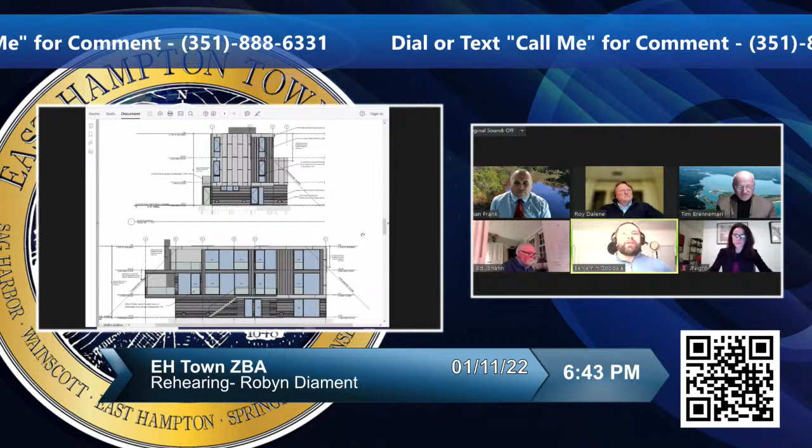I think that you could flip to the next elevation page. See if there's anything that's relevant.

We stayed within the allotted pyramid plane relief that had been granted, so essentially we tried to work within what we have and conform. We're not asking to come any closer, we're not looking to increase the nonconformity in any way. Essentially, it's some minor architectural modification to some of these elements.

So on the top elevation, on the left side, that's the other side of the mechanical room and the storage, which you also see in the middle of the lower elevation, just right of center on the first floor above grade.

And Benjamin, you're also staying within the allotted height of the building as well. Is that correct? Yes. Exactly, no changes to the elevation. Everything here was called out very specifically in the original variance. So the max elevation, the first floor elevation, the proposed, existing and final grade at the entrances to the house are all as per the original approval.

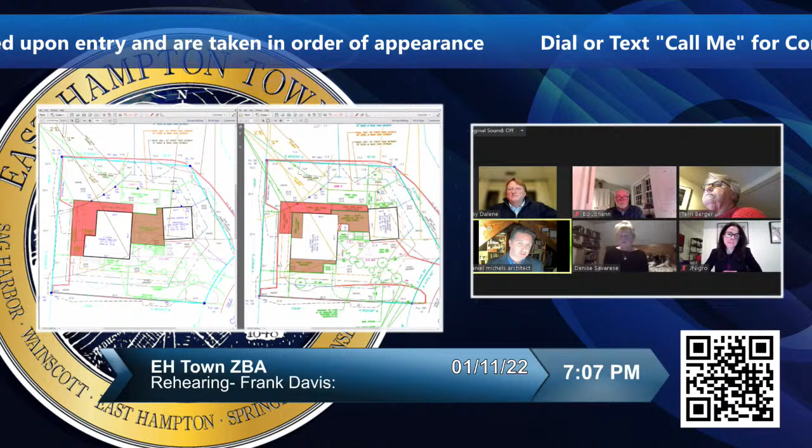We also eliminated the need for the construction materials to construct those two additions, and the demolition that was involved on both of those sides of the house, eliminating further waste into the landfill.

The alteration that was approved originally was modified slightly, pulled back from the wetlands between the two buildings. As part of the initial approval, the owner has installed a nitrogen reducing system, which is outside of the 150-foot wetland setback. We will be revegetating the property, which was pre-existing 100% cleared, into the current clearing code.

The original approvals remained as intended. There is reduction in disturbance to the site, and there was modification to that addition linking the buildings, but I do believe that what we have proposed and what was completed was in kind with what was approved.

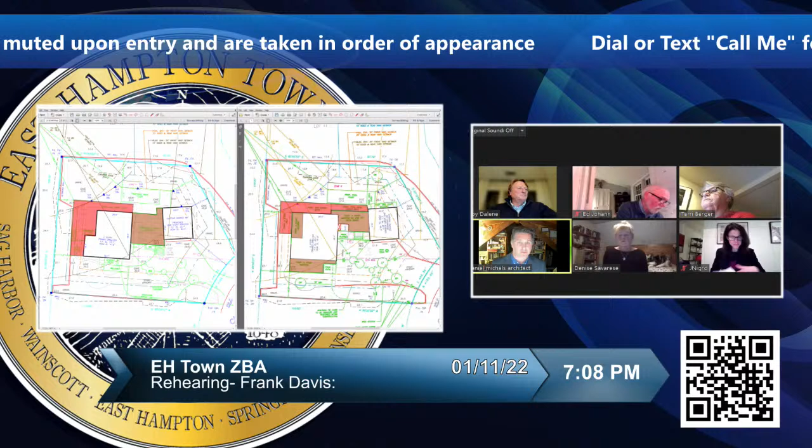Okay, thank you, Daniel. Board members, any questions? Well, concern - we talked about the demolition and the disturbance to the site. The site is pretty disturbed generally around the entire property. I'd like Mr. Michels to address the garbage that's running, that's getting blown around, and we want to clear that up. Also, how did you account for the character of the neighborhood in making this change, moving some of the extensions of the house to the west side, and creating that large 2-floor extension and extending it further to the south than was originally approved also?

Sure. I'd like to speak to the trash. I have been requesting that it has to be cleaned. I have cleaned it several times myself. Apparently the cover has blown off the dumpster, and I was there just last week and there was not that garbage there, so it must have happened over the last few days, and I will have that taken care of tomorrow immediately. The builder has gone through a tragedy with his family - his daughter was in a terrible accident, so it's been hard to communicate with him lately, but I will have that taken care of tomorrow for sure.

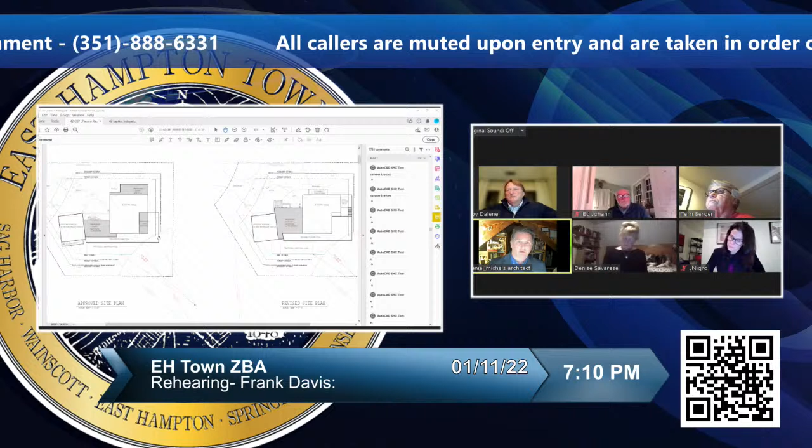Unencumbered views out to the water, where formerly they were disturbed by these 2 additions. Looking over this 1-story addition that's now 2 stories, you look directly at the roof of a house to the north, which is on the water. So the neighbors' views of the water are not affected by shifting these additions over to this addition here. So we felt it was appropriate a change.

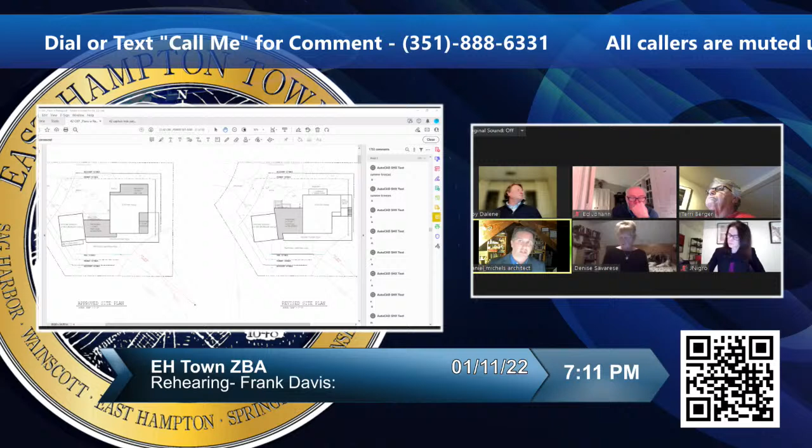Yeah, it does affect the views from the street, though, as was shown in the photos of anybody who's just going by. I did have another question - you said there is a re-veg plan, and I believe maybe Tyler can show that to us. I have it here too, I could share if you'd like. Yeah, let's take a look at that.

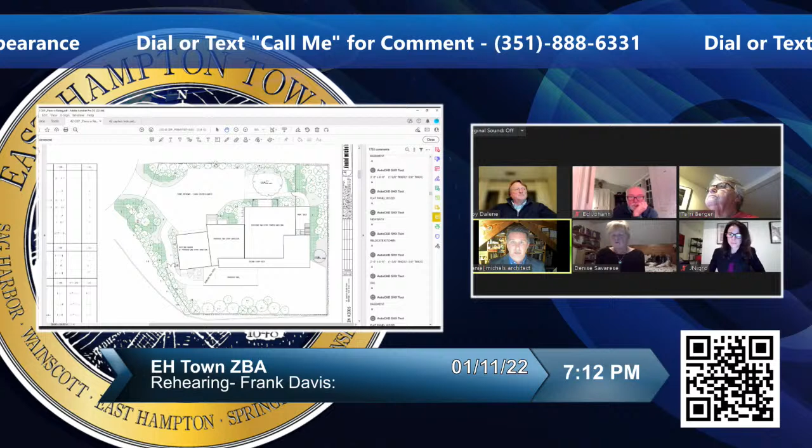So this is very similar to the original approved re-veg plan that was done by Jim Grimes. We have also included this area here, which was basically just brambles and was cleared out, and we're going to be revegetating with bayberries, pasture rose, some cedar. All along the south side is bayberries, and along this side as well, bayberries, some shad bush, and some cedars for screening, which follows suit to what was originally proposed.

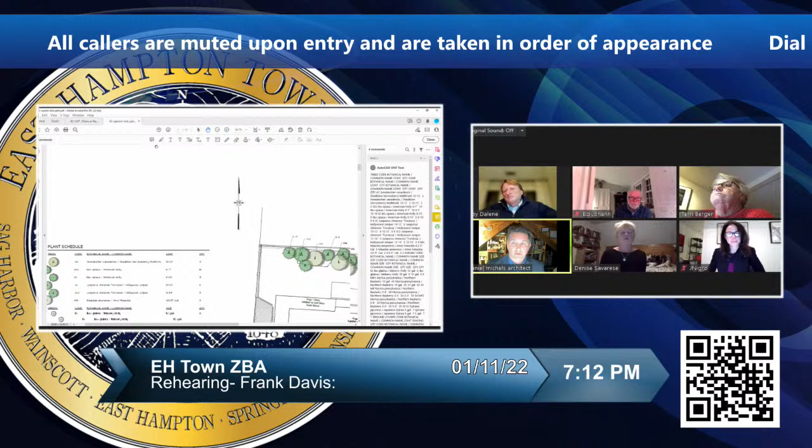It's very similar to the original plan, which I can show you here as well. This was the original - so re-veg here along the property line, some re-veg along the back north side, and then along here. This was shown as undisturbed, but it really was just messy, and so we're going to clean that up and replant.

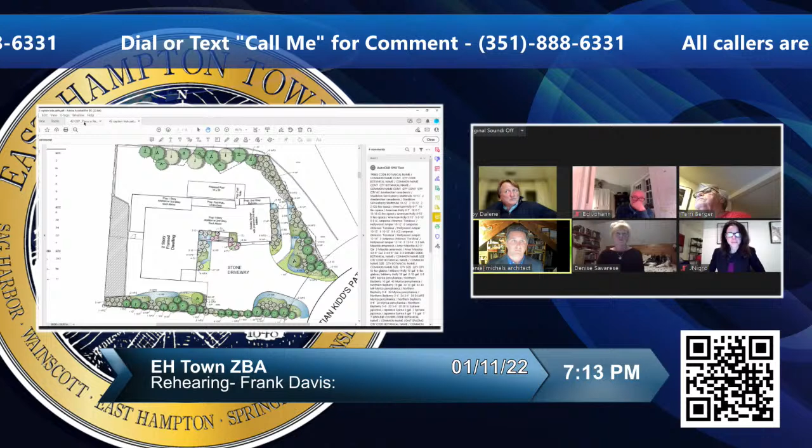Pretty much follow what was shown here. Okay, now, as you were looking for that, you had a photo of the before of the house - could you just show us briefly? That was the rendering from the original architect. Yeah, so that was the original look of it.

Correct. Okay, now, the applicant wants to keep all the decking on the western side that was originally slated for the extensions. Would you be willing to covenant that portion of the decking so it would never be enclosed or requested to be enclosed? I think, sure, that's a reasonable request. Absolutely.

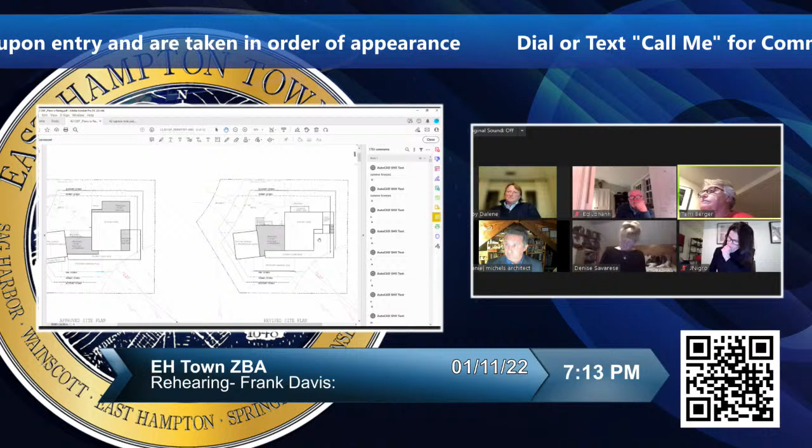Okay, you mean not covered by a roof? Right, second floor deck. Not become part of living space, interior living. I mean, I would consult with the owner, but I don't see any issues with that myself.

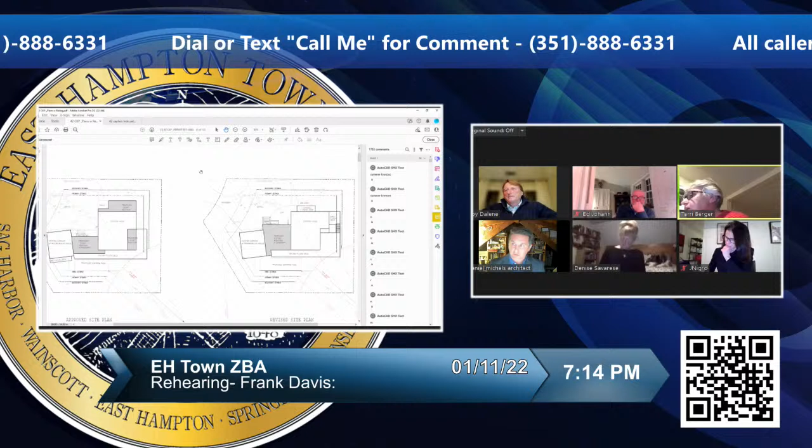Okay, and I just have one more question. I believe the amount of bedrooms was 4 bedrooms to start with on this, and it's remaining 4 bedrooms. Correct, I believe that's what I said. Okay, all right, that's my questions, Mr. Chairman. Thank you. Anybody else?

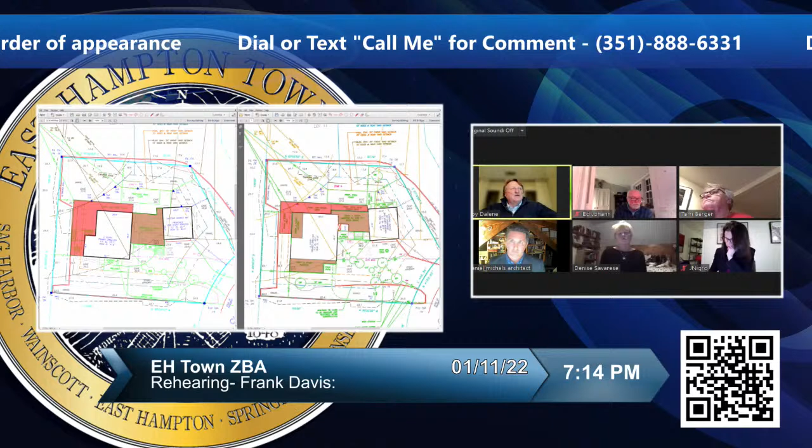No, then if we can go to planning, Tyler. Sure, absolutely. Tyler Borsak for the Planning Department. Tyler, if you raise your right hand, do you swear or affirm to tell the truth, the whole truth, and nothing but the truth? I do.

Thank you. So this project was originally approved for a 1,310 square foot addition, which with the shifting in the additions is the same number. There was some discrepancies from what I could tell, just doing some basic measurements. But I think what the issue was, originally the number didn't include the addition over the garage, which neither would have, so that didn't change, and I think that's where the discrepancy came from.

But the 1,310 square feet, which is the large section now in the center, is the same as the center connection, as well as the west and the southern additions combined. So essentially they just shifted those into one addition, condensed the footprint essentially, and changed the decking slightly. Overall, it's roughly the same impacts.

None of the setbacks have changed. Actually, the additions have gotten further away from wetlands. The decking remains the same because that northwest corner really is the closest point. But other than that, it's very similar as far as impacts on the surrounding natural features compared to what was already approved by the board.

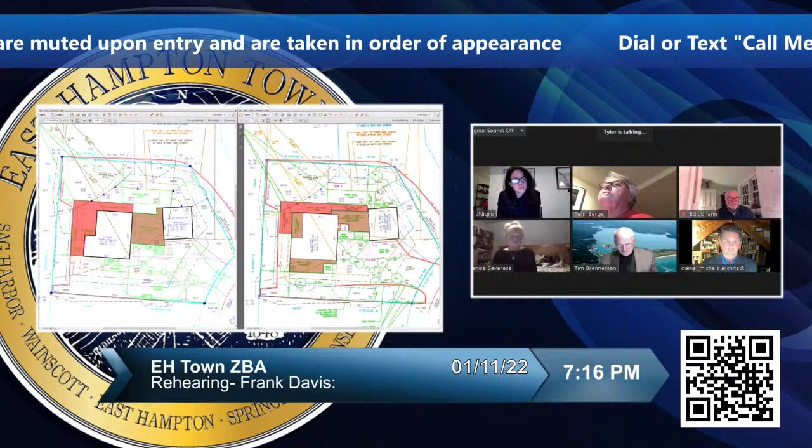Other than that... Okay. Sorry, no, go ahead. Now, can you point those out on the survey where the variances are? Sure. The closest points would be the corner here in the northwest from the wetlands to the decking, and then the additions onto the residence are a little over 100 feet, I think they're like 101 or something like that. So actually, I don't believe they would need a variance anymore.

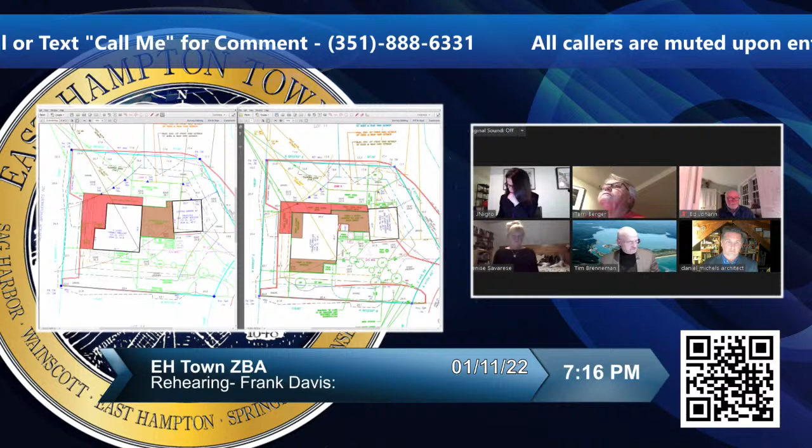Okay. For those, I could measure it out real quick just to make sure that I'm remembering correctly, but I believe they're a little over 100 feet now. In the original determination, the only variance was for that northwest corner of the deck. Right.

Okay, anybody have any questions for Tyler? No more. If not, Matt, is there any callers? You have 0 additional callers. Thank you. Okay, with that, Terry, would you like to close it up?

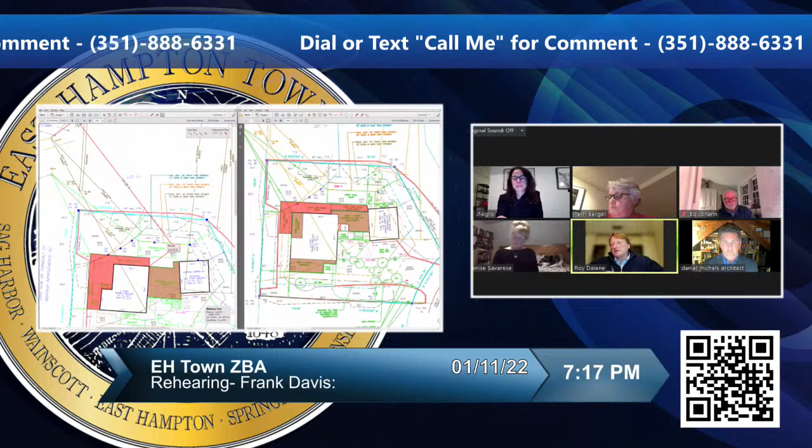Okay, yes. For the matter of the rehearing for Frank Davis, 42 Captain Kidd's Path in Montauk, tax map 300-004-01-02, make a motion to close the public hearing and to leave the written record open for 2 weeks from the time that the transcript posts on the town website.

Anybody going to second? I'll second. I'll second, and I concur as well. Okay, I concur.

All right, next we have a hearing. It's for Jeff Whelan. I don't know if it's Whelan or Whelan. I would say Whelan. 170 Marine Boulevard, Hampton Dunes, Amagansett, Suffolk tax number 300-176-04-12. The applicant is Jeff Whelan. Size and location is 15,002 square feet at 170 Marine Boulevard, Hampton Dunes, lot 49, map 4694 in Amagansett.

Description is to construct an approximately 740 square foot second-story addition, solar panels on the existing roof, repair an existing shed, repair an existing fence with new gates, replace the existing front porch, and an upgraded sanitary system within jurisdiction of setbacks of freshwater wetlands, duneland, and beach vegetation.

The relief sought is a natural resource special permit pursuant to 255-420 of the East Hampton Town Code, and 1 variance is required for this application. 1 variance of 39 feet is required from 255-4-30 of the Town Code in order to construct a second-story addition 61 feet from freshwater wetlands where a 100-foot setback is required, and any other relief necessary. The zoning district is B residence, AE flood zone, elevation 10, class type 2.

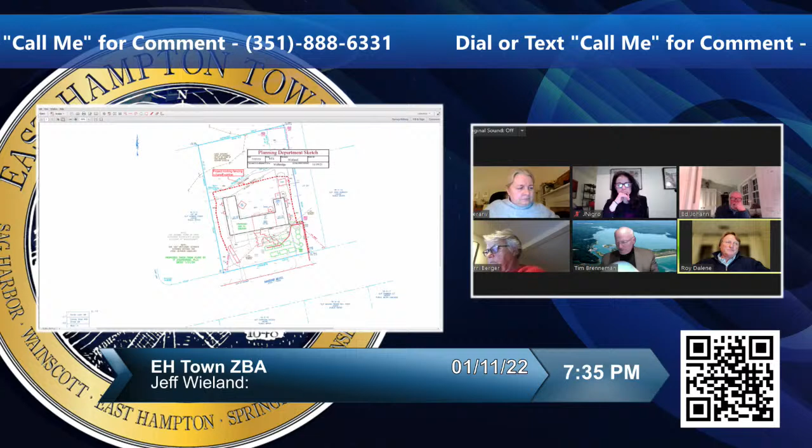I have no further questions, Mr. Chairman. Okay, anybody else have any questions?

I don't know, in the memo there was a concern about what mitigation is being offered and what the scenic easement... I guess there was some disturbance into the scenic easement. Do we have an answer on that, Tyler? Was there anything submitted? Yeah, I think Terry, that's where we were talking about the re-veg on that.

They planted some Rosa rugosa. I think that's where we got it. So they were under... Yeah, Tyler, well yeah, maybe Tyler can. Sure, do you want me to just hop in now? Sure, yeah, go ahead Tyler. I'll just jump straight to that and maybe circle back to other stuff.

So there was a violation at one point in time on this property where, let me pull up the survey, there was some clearing into the scenic easement. That was revegetated before this application occurred, and that's where some of that Rosa rugosa came from. It's not a lot, most of it's standard bayberry and other things and inkberry, things like that, revegetation. But there was some Rosa rugosa mixed in, which is what we wanted to see fixed.

It's tough to tell if the landscaping plan does more than that. The plan that they did submit is sufficient - it's got bayberries, inkberries, Virginia rose, which would be fine as well. So that plan in and of itself is fine. I don't know if there's any more other than that's in the scenic easement. That might just be the scenic easement line right there. It's obviously not on there, so it's hard to know. But overall, this revegetation plan is fine.

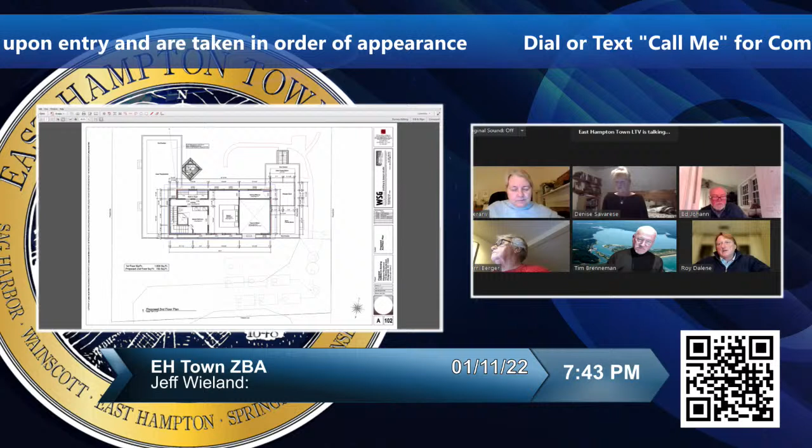Hello caller, are you part of this application? Hi, yes I am, thank you. My name is Jane Mearing, I live at 32 Ocean Lane, and I am not an attorney, if you want to swear me in. Sure, do you swear or affirm to tell the truth, the whole truth, and nothing but the truth? I do. Thank you. Congratulations everyone on new seats, and Happy New Year.

As I said, I live on Ocean Lane. I'm not a directly contiguous neighbor, but this house is within a couple blocks of my house, and I pass it at least two times a day. I'm not going to go into long comments on the house, but I did have one concern I wanted to raise. I know it's not in the application as checked off, but when I went through the files, I saw three different places - a drawing, a rendering, and a survey - that had a proposed pool and deck.

Actually, before, when you pulled up the computer rendering, you could see it. One said it would be a 20-foot pool, one said a 10-foot plunge pool. So I just wanted to clarify that that's not going to become part of this, and then also ask the board if they would consider, as mitigation, a covenant of no pool in the future on this property.

Pools in the front of a house have a lot of impact on the neighborhood. We don't have a lot of them. And Marine Boulevard, even though it's a main road with some large development, is a road the neighborhood uses - it's quite quiet, and we use it for jogging and strolling and bike riding. A pool in the front would have a lot of disturbance. So I wanted to raise that as a possibility, and also clarify that a pool is not part of this application, because it showed up three times in three places in the files.

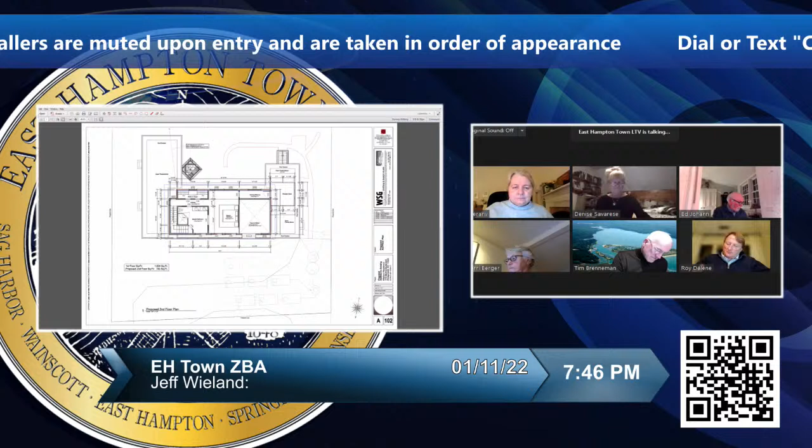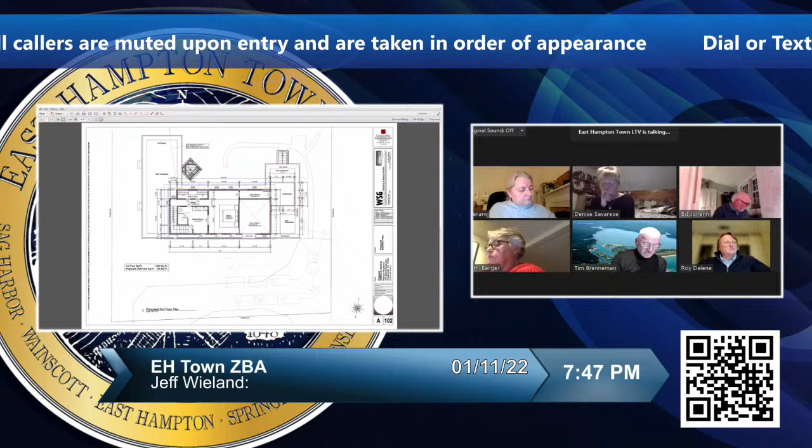I'm going to give you a little bit of the background story of the house. When the Whelans purchased the house, they absolutely loved the bones, the old school bones, if we can put it that way. They really wanted the intent for the restoration of the house, and then the addition was to actually look like it was always there. They had other options for houses, but they fell in love with the quaintness, as one of the neighbors was correct on, the strolling and the community. So their biggest concern was two things: they have a family, so there just physically isn't enough room for them all to enjoy the house, and the main concern was to stay within all of the parameters of the pyramid rule, the heights, everything, making sure we were as sensitive as possible to the neighbors, and then bringing the house to its original condition.

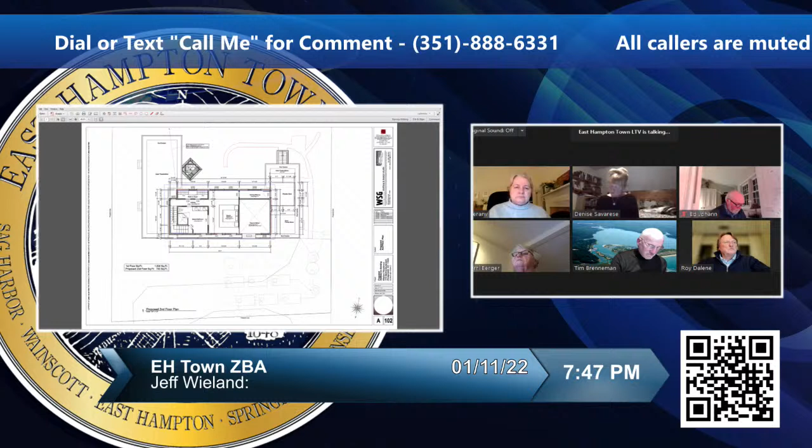So much so that I worked with the original builder owner of the house, and they had some feedback on what were the thoughts of the original design when it was built. So this is much more a passion project for them, not about building a big statement house on the beach. In some of the renderings, a pool was actually in the initial idea renderings, and then very quickly the town made it clear, when we worked with the town, that certain things were just not going to be within the scope of possibility. So that's when it was not discussed any further.

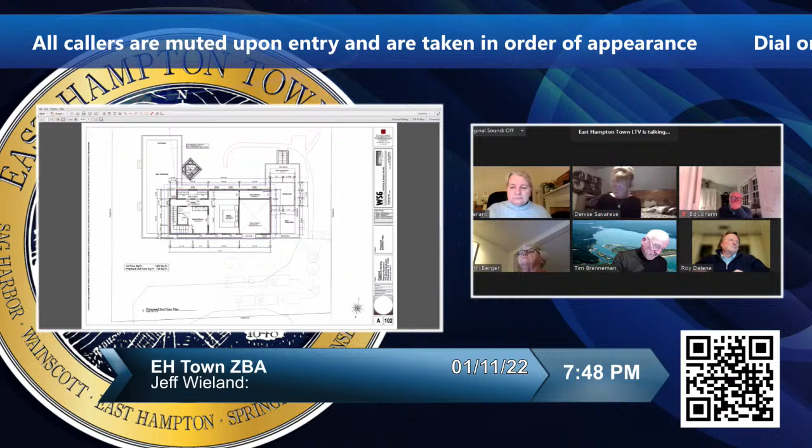The family is in love with the location, and we're perfectly happy to vegetate even more. We vegetated pretty heavily, but if more vegetation is asked, they would be happy to do more. The main concern is about getting the family into the house sooner rather than later. We know it's been a long process, and we appreciate the board has been overwhelmed with applications through this whole crazy period with all the mass building going on out there. But the homeowners are very eager to get started and get it wrapped up so we can put the inconvenience of working on a house behind them, for the neighbors as well as themselves. The only takeaway is the style of the house is absolutely going to be married to what the original intent of the house was.

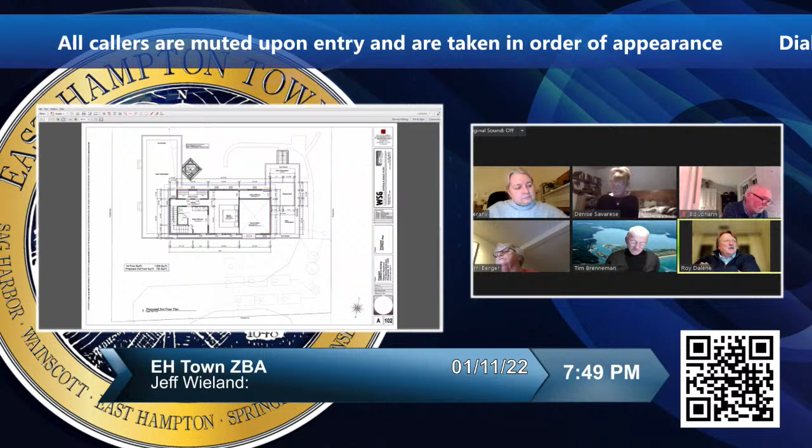Okay, I think the board would be glad to see a proposal for some increased vegetation, particularly protecting the wetland. Perhaps we can leave the record open for a submission of a suggested planting, but I'd like to see some increased protection of the wetlands. Is there any possibility we can submit that and still keep the approval process moving forward? We're happy to do it. There's absolutely nothing from our side saying we wouldn't do that. We're more than happy to, as long as it's submitted before the record closes.

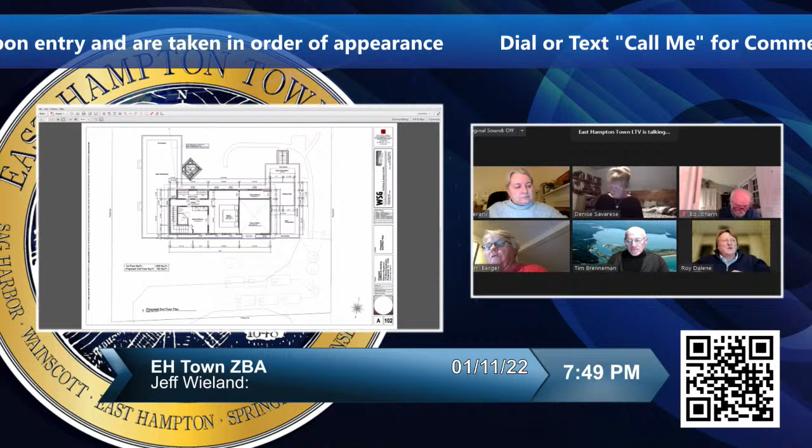That's right, as long as it's submitted before the record is closed, I would believe. We'll get on it immediately, which we're about to announce when that would be anyway. So, board members, any other questions? No, okay.

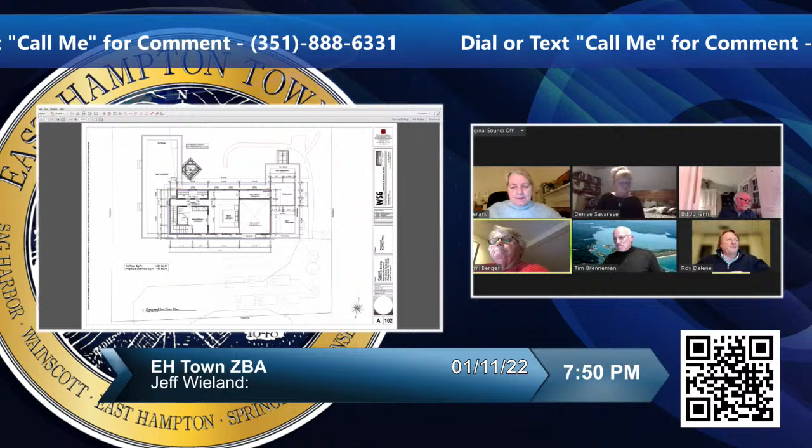Tim: Okay, so I'm going to make a motion in the matter of Jeff Wieland at 170 Marine Boulevard in Amagansett, Suffolk County Tax Map number 300-176-4-12, to close the public hearing. And let's see, do we want to close the written record or do we want to hold it open for a period of time? Well, the written record will be open until 2 weeks after the transcript posts.

Approximately how long is that? I think you've got about, Counsel, how long do you think that normally is? It usually takes at least a few weeks, but it's been posting a little earlier in the past month. I know that was the case. I don't know if that's just luck or if things are running a little more smoothly these days with respect to that. So the question would be to counsel here whether or not 30 days holding the record open would be acceptable to you to be able to submit a revised revegetation plan.

Yes, we could probably do it sooner, but you said what, the transcript usually takes 14 days? Okay, 14 days, okay, that's fine. 14 days would be great. And just for my own, I'm sorry to ask this, but so after the record is closed, when are we put on for a decision? Usually, I know you're very busy, but I can answer that. Once the record closes, we have 62 days to issue a determination.

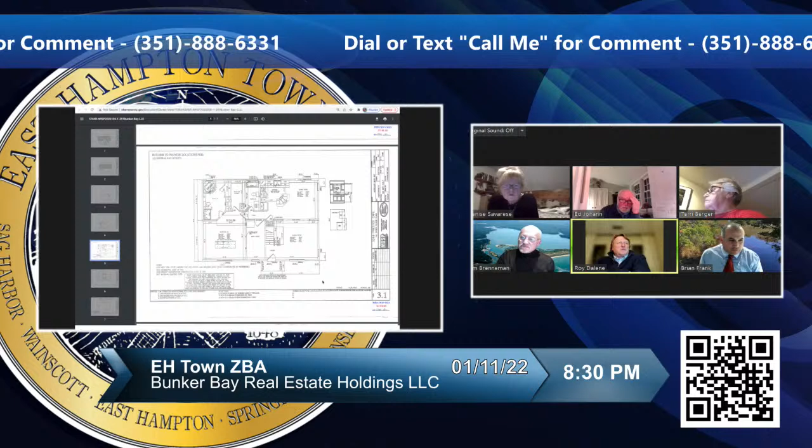Well, it seems to me this would reduce, but the notice is based on the plans dated September 30th, 2021, so I would assume the variance, the pyramid variance, is still based on those plans. Is that correct?

I think yes, that's our question, it's based on the Cape. So we're asking for a 13-foot and a 5.5-foot variance.

I'd like to see what's... So the notice is correct? Yes, the notice is based on the Cape plans. Okay.

But I don't see any pyramid drawings. No, I don't either, not on this. So, to our knowledge, is the maximum variance of 13 feet shared with that, what is it, Hollywood Drive or Hollywood Road, whatever it's called? Is that what we're talking about?

I think that question was for Steve, but generally the larger variance is usually from that closest pyramid line. And if the roof ridge runs north-south, then it makes sense that the largest nonconformity to pyramid would be along the Hollywood Avenue property line.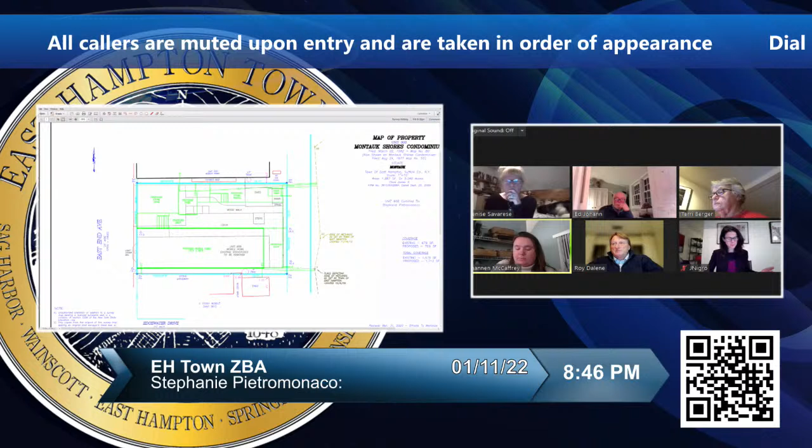Good evening. We're here discussing Unit 808 of Montauk Shores. The applicant is proposing to demolish the existing improvements and construct a new mobile home, decking, outdoor shower, shed, and stone paving. The variances requested are substantial due to the fact that the lot is located at the eastern portion of the complex where the wetlands are located and the very small lot size that these lots have. The proposed improvements are the minimum needed to meet the goal of the applicants and will not encroach any closer to the wetlands than the existing improvements.

This has become the owner's primary residence, and the current structures were installed prior to the adoption of zoning, and they need to be replaced to be more efficient and in conformance with local and state codes. The applicant also understands that this work will not be completed until the new septic system for the complex is approved by Suffolk County Department of Health Services, which is currently under review. Applicant has received approval from the DEC and wishes to have this permit in place for when the septic is approved. Please let me know if you have any questions or comments about the project.

Members, do you have any questions? Do we have any notion about where we stand with the Suffolk County Health Department approval of this master plan? Currently pending. I don't know exactly where the complex is in the review process with the health department. Okay, thank you. Any other questions? No. If not, we'll go to the planning department.

Good evening, Tyler Borsak for the Planning Department once again. How are you doing, Tyler? You're sworn in already, so I believe so. The current application is proposing to demolish and remove the existing mobile home and associated structures and replace them with a new mobile home, decking, outdoor shower, shed, and stone paving. The proposed improvements are comparable to what currently exists on the property.

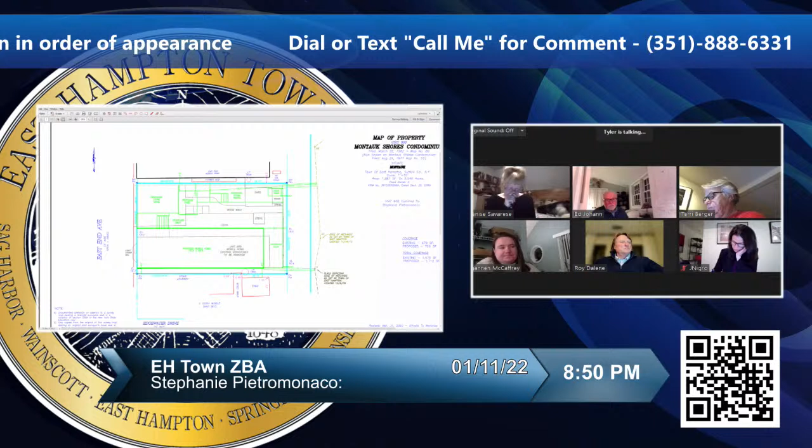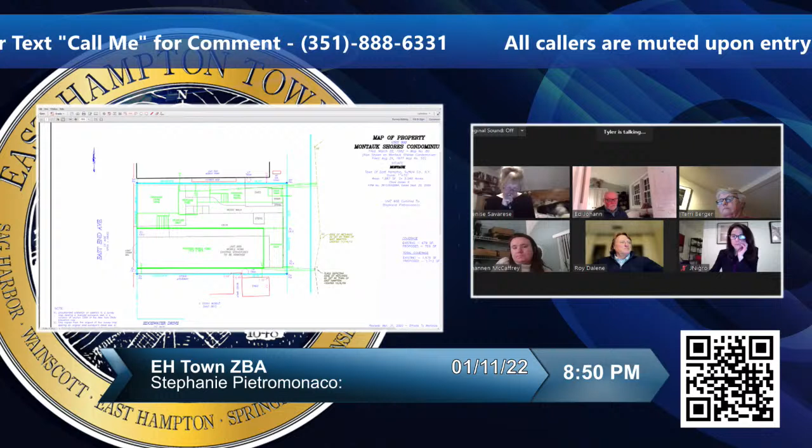The board should consider the fact that many of the units within the Montauk Shores condominium complex were erected prior to the adoption of zoning. However, the restructuring of the complex will become increasingly necessary in the future as environmental conditions change over time. Due to the legal issues regarding the sanitary upgrade of this parcel, the building department has put a moratorium on the construction of new trailers within the complex. No additions should have been added to the master plan since 2018, which is the last time the master survey was updated. However, NRSPs may still be granted while that is being worked out. Other than that, I can answer any questions you might have.

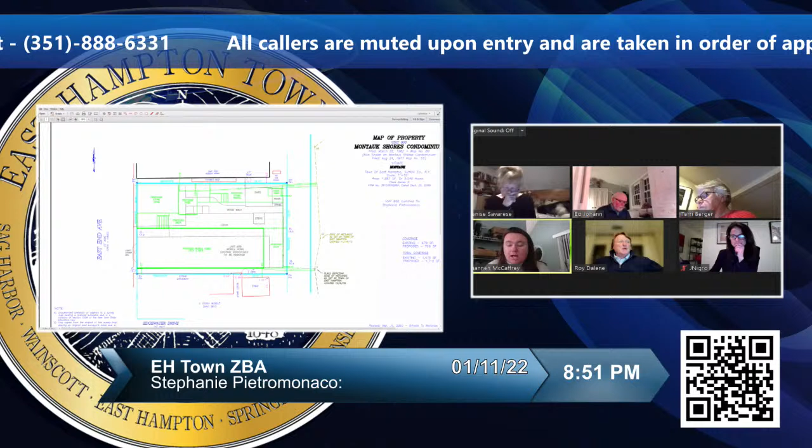Any board members have any questions for Tyler? I do not. I do not. Shannen, just real quick, do you agree with the recommended project conditions? Ms. McCaffrey? Sorry, yeah, we have no objection to having this. And would the project—I'd like to add to the project conditions that a dry well be added for the outdoor shower. Okay, yeah, that's not an issue. Okay, thank you.

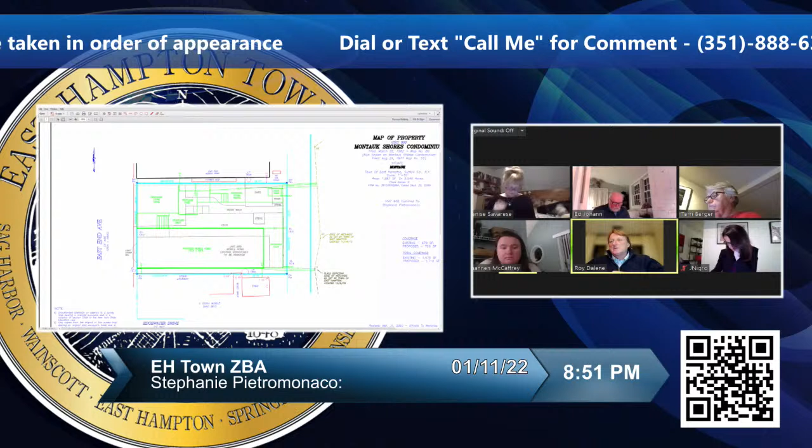Matt, any callers? You have zero callers. Thank you. Okay, thank you.

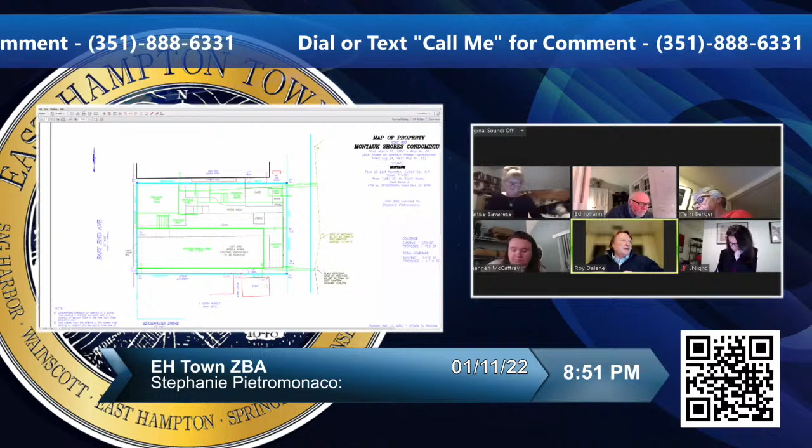Ed, your honor to close it. Thank you, Mr. Chair. In the matter of Stephanie Pietromonaco, 100 DeForest Road, Montauk, Suffolk County Tax Map 300-032.1-01-244, I'd like to make a motion to close the public portion of this hearing, but to keep the written record open for two weeks until two weeks after the transcript is posted on the town website. Second that? I concur. I concur. And I concur as well. Thank you. Thank you, have a great evening.

Next, we have Mohammed Grimeh, 425 Cranberry Hole Road, Amagansett, Suffolk, tax map number 300-128-01-32.1. Applicant is Mohammed Grimeh.

Size and location is 54,325 square foot total. 425 Cranberry Hole Road, Cherry Point, Lot 1, map number 11091 in Amagansett.

The description is to construct a 3,926 square foot total 2-story residence, 870 square foot pool and spa, 697 square foot first floor decks, 881 square foot of covered first floor decks, 741 square foot second story covered deck, 367 square foot of second story deck, 583 square foot of roof deck, 73 square foot of covered entryway, walkway, driveway, and a sanitary system on a parcel of land containing beach vegetation, dunes, and tidal wetlands.

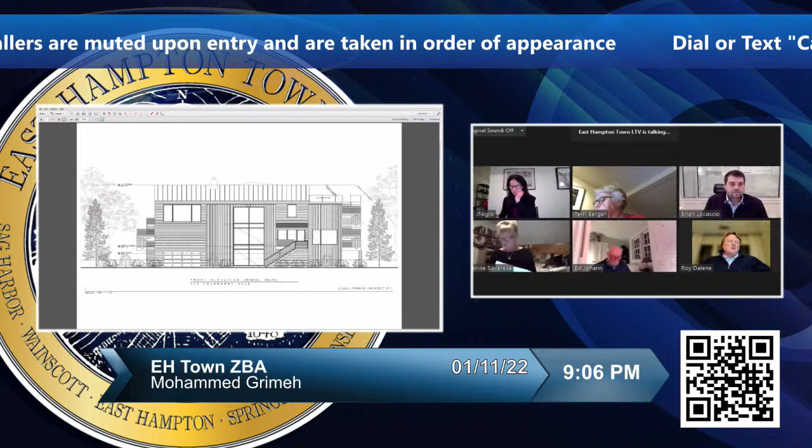It looks like the garage is partially above ground, partially below ground. What's going on there? So the grade at the front of the property is around 3, so there will be regrading, and I believe that is actually shown on the septic plan. I don't know if you guys can pull that up, but we can certainly submit a grading plan that shows it a little bit more around the house to address where the garage is.

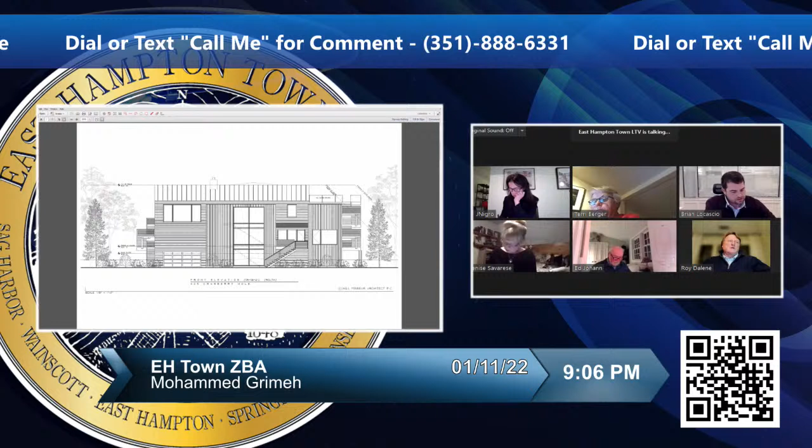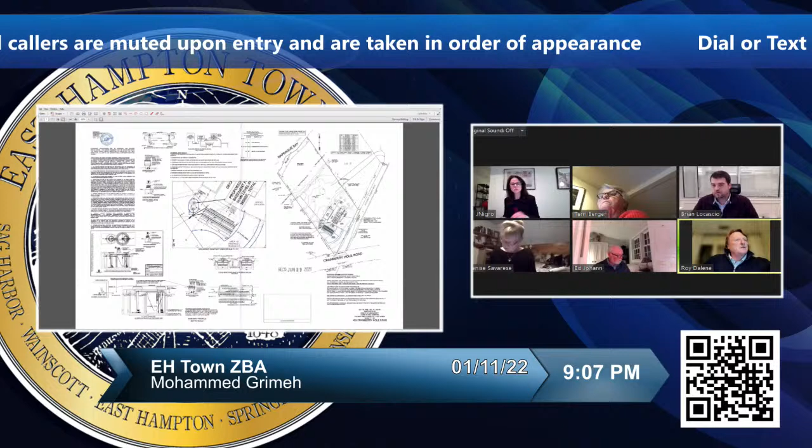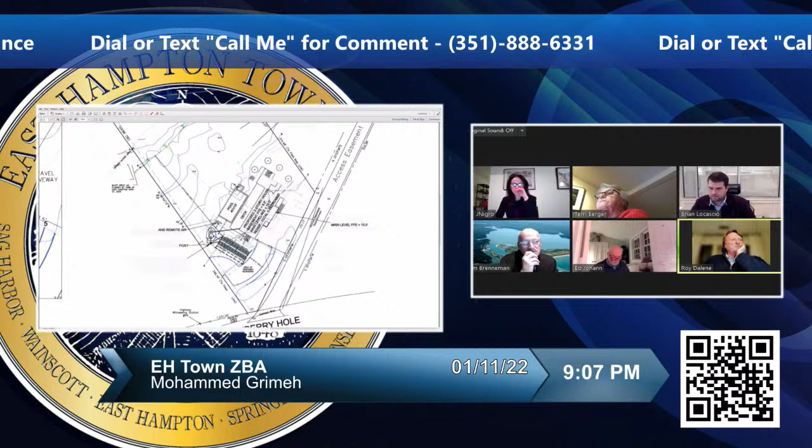But there will definitely be a little bit of regrading to make the septic system work. Okay, that's the regrading for a septic system we understand, but we don't want any substantial regrading on the property itself. If you take a look at the elevation of the house, let me just see what we got here. We got the top of the ridge is 39 feet, right? Let me just see, I lost it. It's 39 feet, yes. The grade, natural grade that goes through the house at that point is elevation 6. So that means the height of that ridge is going to be 33 feet above grade. Is that right?

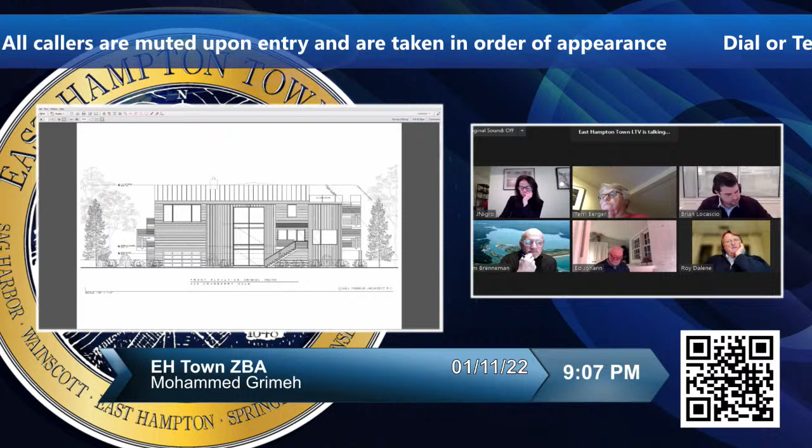Yes, I believe so. What's the maximum height? Well, it's 32. So, right, so we've got an issue there. I'll have to double check with Will on that. Yeah, I'll have to talk to Will on the elevations, but yeah, that would be a foot off. You're correct.

As you enter that garage, is there going to be any retaining walls or anything to contain the grade? There wasn't a plan to be, but I can certainly talk to the architect Will regarding that. If there will be, I think we need to see more of that because that's going to affect the overall site plan, no? Correct, yes.

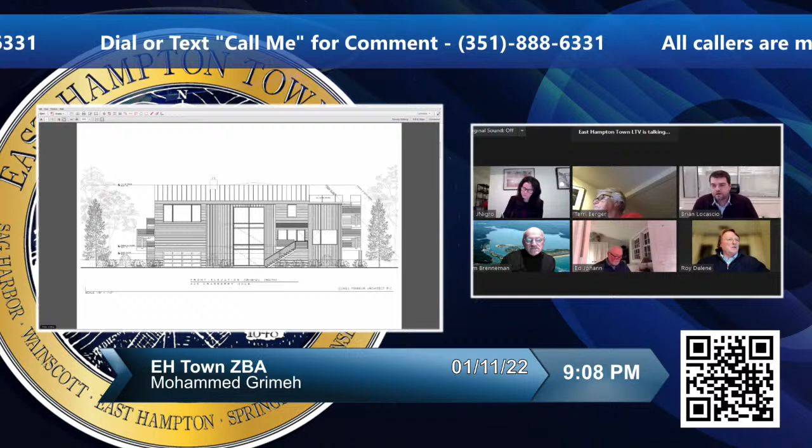Also, it looks like the height and pyramid are pretty much maxing out even on the other side of the house, so just got to be careful of what we do. I don't want to see — we want to maintain the natural grade as much as possible on the site. Which I understand, so I will reach out to Will, and if possible, if we could leave the record open to make a resubmission regarding the elevations, and if there is a need for a retaining wall to enter the garage. Okay, thank you. Board members, any other questions?

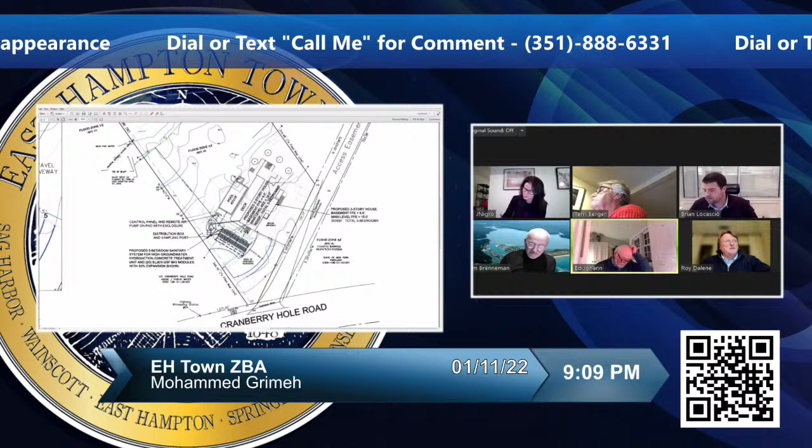Yes, I have a couple, Mr. Chair. If we go back to that lower level plan, there are three storage rooms down there, and looking at the section, the height reads at 7'8". I think the board would be interested to know that long term this is not going to be converted to living space. At 7'8" it's possible, I'm not exactly sure, it's not detailed completely, but it's quite a bit of space down on that lower level for storage, and it's not inconceivable someone would come back looking to have that turned into some other usable living space.

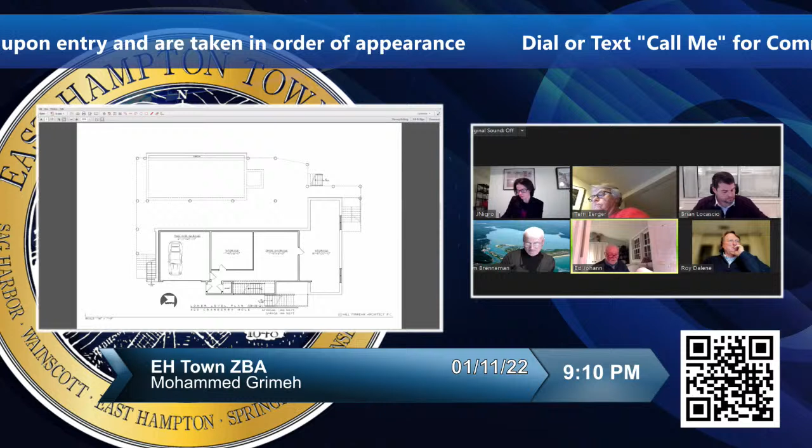That's a concern. And then I noticed these notes that appear to be pilings. There's no foundation or piling plan included in this, and I'm wondering how it might affect what we're doing in terms of final grade. I'd like to know more about that. So if he's going to submit to us, I'd like to see the foundation plan, more than just the outline of the footprint, to see what we have in terms of section. I know there's a section there, but there's not a real detail on that. So that's a concern to me.

And then I just think in general - I know it was mentioned in the presentation, not by you Katie - but we still have great concern for the fact that the adjacent property lost 37 feet in 20 years, and we're going to be looking at that long term. So what we do in terms of an easement long term to somehow mitigate that movement will have to be really well defined in the proposal on what goes on within this, and that'll be worked out with the building department within this easement. I think we have plenty of evidence of what we've seen up and down the run here.

So I'm very concerned about what this is going to look like in another 10 years. We should be looking out in terms of protecting both the environment and the surrounding area some 30 years out when we make these decisions. This one looks to me like we have to put a fine eye on what we're approving, a house this size in this kind of vulnerable position. So I'd like to know that the easement is going to have a planting plan that comes up to fully meet the standards of the planning department, and that you work hand in hand on that.

I'm going to, if you're done, jump in and try to answer some of those questions if I can. Yeah, go for it. So to start with the living space -

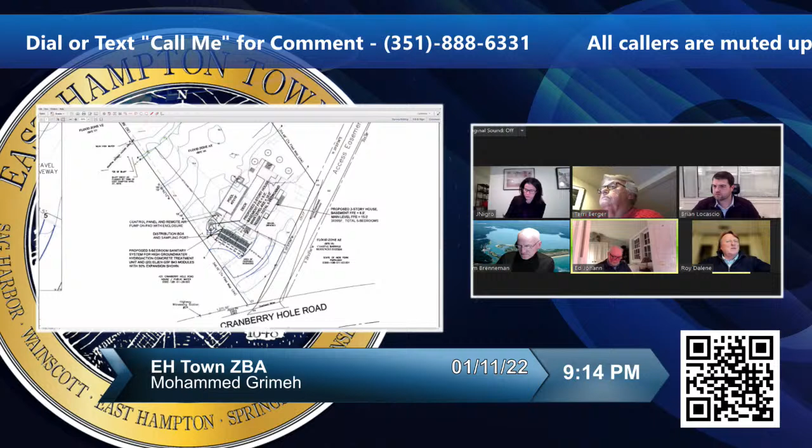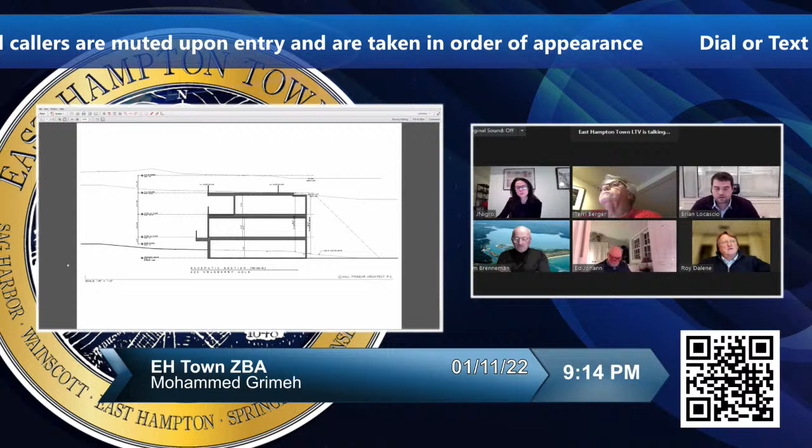Yeah, I think it's - Roy, is it the last page there with regard to the plan? Right there. One section shows there is a roof deck, that's showing from that angle, and that's why on some of the elevations they show a 25-foot max and then a 32-foot max. Okay, all right.

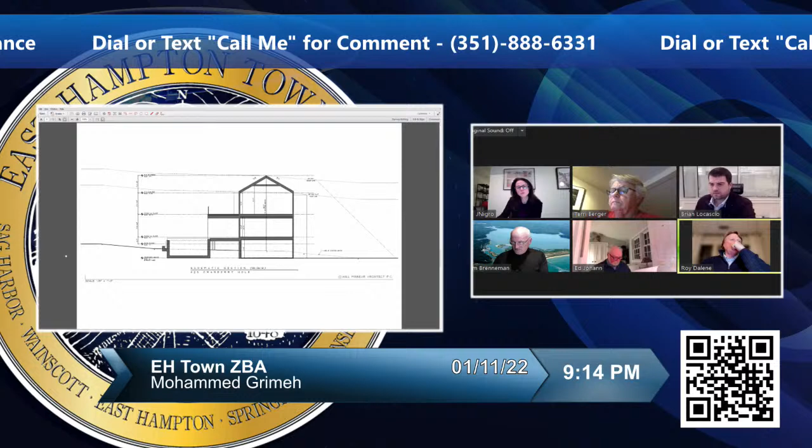Anybody else have any questions?

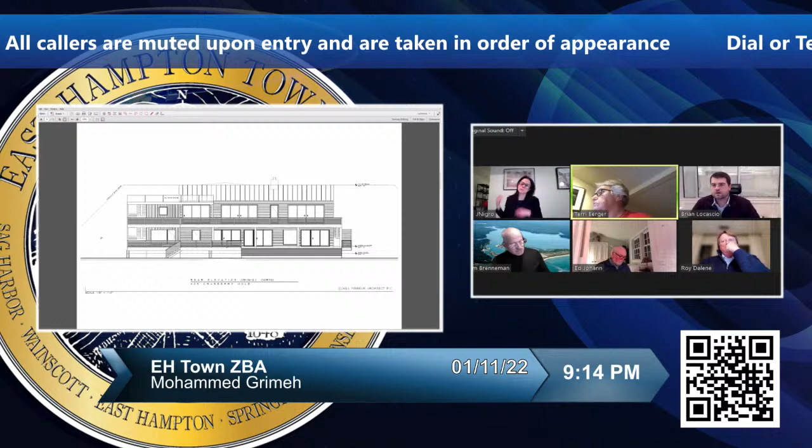Just a comment. The pool is outside of the variance, but looking at the photos member Savarese showed us with all that nice dune vegetation, there was a lot of discussion about meeting the setbacks from the dune crest. I still have concerns about a pool being that close. I believe in the TAM it said it's 104 feet, or 103.5 feet, which is still pretty close to where it would need a variance. There's a concern for preservation of that dune vegetation, along with the TAM's reference to erosion in this portion of town, and concern about the increased frequency, intensity, and fragility of the dune land soils. Maybe a smaller residence in scale would be more appropriate.

Adding to that, I think that's why Tyler Borsak's TAM also recommended putting the house at the lowest elevation, because there would be less disturbance in the dune crest area, and you'd preserve the vegetation that's there.

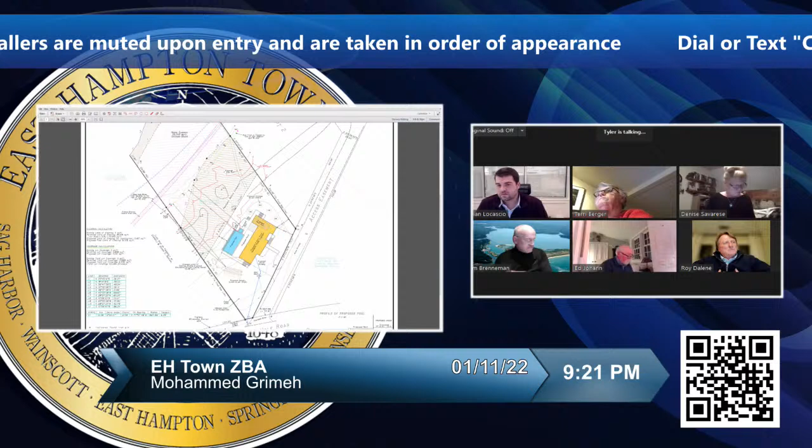Good evening, Tyler Borsak for the Planning Department. This parcel is located on Cranberry Hole Road. The northern part of the lot bounds on Napeague Bay, which is a New York State significant habitat and the Peconic Estuary critical environmental area component. The unimproved areas along Cranberry Hole Road are characterized by intact rolling dunes on which some of our most sensitive species of vegetation and wildlife inhabit.

To the south of Cranberry Hole Road is part of Napeague State Park and is wholly located within the scenic area of statewide significance. This vacant lot resembles the same ecosystem on the north side of the road, containing rolling dunes and significant high-quality beach vegetation.

The parcel is located in Coastal Erosion Overlay Zone 2, which does not allow construction of hardened structures without a variance from the zoning board. Development along Cranberry Hole Road should be closely scrutinized and monitored, as the coastline on this north side is one of the most dynamic areas in town.

Parcels along this stretch of road have been known to lose feet from the dune crest within a single year. The subject parcel is one of the most dynamic along that stretch of road. The Cherry Point minor subdivision was filed in April of 2004.

The dune crest, initially flagged and verified by the planning department in 2000 before that sub-waiver application, has since shown a loss of 63 feet on the west side and 70 feet on the east side. That's over a 21-year span, averaging about 3 feet per year.

Other parcels in the area have been documented to lose 8 feet in a matter of months. The erosion is both chronic and episodic. The area is battered by seasonal storms that have and will continue to increase in intensity and frequency due to climate change. The structures are sited to meet the 100-foot setback, with the pool being closest at 103 feet.

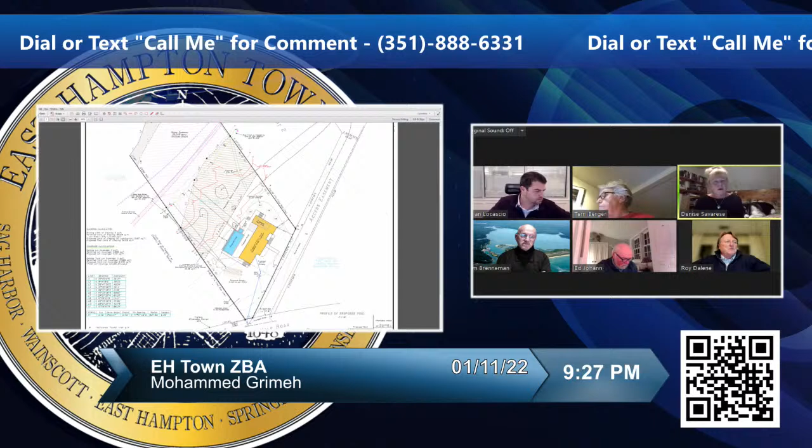Can I ask Tyler a question? Does the house to the west, the one built in 2001, have a pool? It appears to be. If you go to the site plan on the building plan, it's showing a pool.

Yeah, okay. And the one just to the west of that has a pool as well. Thank you. I'll highlight the one we're looking at, and then the neighbor, and then further over to the west, as well as swimming pools.

Yeah, but those were constructed - well, we know the one next door is constructed. The one to the west is 2001. I'm not sure. What would that address be?

Any other questions, or should we go to Katie and see how she wants to move forward? So would you guys be okay, Brian or Katie? We'd request that a written submission be open so we can take this back to our client, address it, and resubmit.

30 days. So we're leaving the record open for submissions, or you're coming back to the board? Are we getting elevation plans, foundation plan? We're going to have to submit all that, correct. We need to discuss your comments with the applicant, address them as best we can, and submit our modified plans and site plan. We'll get you an updated set of plans, an updated septic plan, and an updated survey from Saskis as well.